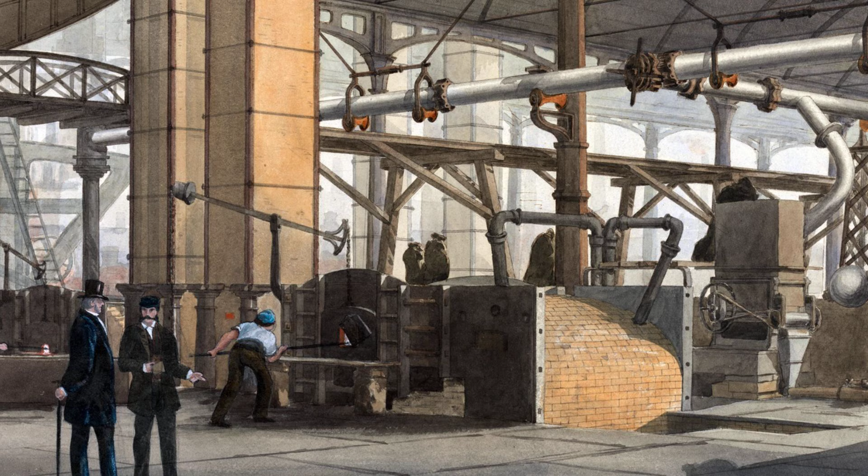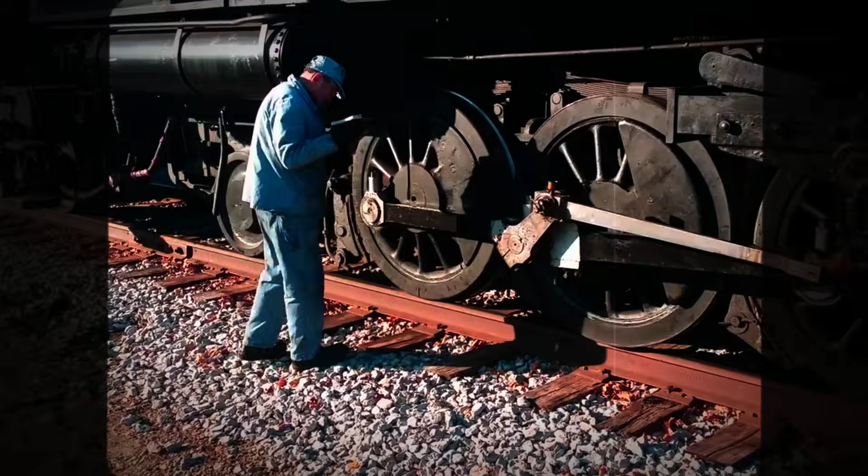The man who invented the turbine locomotive died forgotten, and the reasons why say more about progress than any success story ever could. By 1908, the heart of railway power was still the piston-driven steam locomotive, a machine both celebrated and resented by railroad engineers. Every journey began with the same ritual: oiling the rods, checking the valve gear, and bracing for the relentless pounding that echoed through the rails.

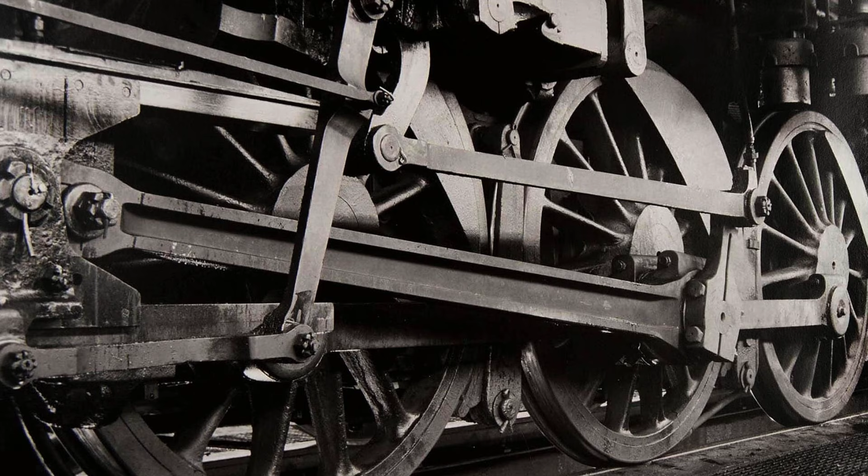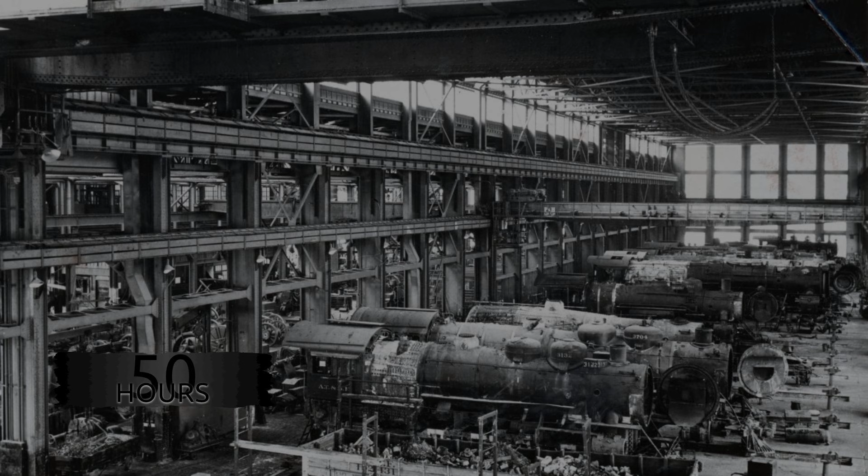Underneath the spectacle of churning wheels, an invisible war was being fought against the laws of physics and the limits of Victorian engineering. The numbers were impossible to ignore. A typical mainline locomotive demanded nearly 50 hours of maintenance for every 1,000 kilometers traveled. Bearings wore out, pistons cracked, and valve gear needed constant adjustment. Each mile cost more than just coal. It ate up labor, steel, and time.

Fuel consumption was staggering. In the early 1900s, railway companies reported burning through 85 kilograms of coal for every 100 kilometers, a figure that barely budged, no matter how much boiler pressure was pushed or how carefully the firemen stoked the flames. But the real enemy was hidden in the pounding rhythm of the pistons.

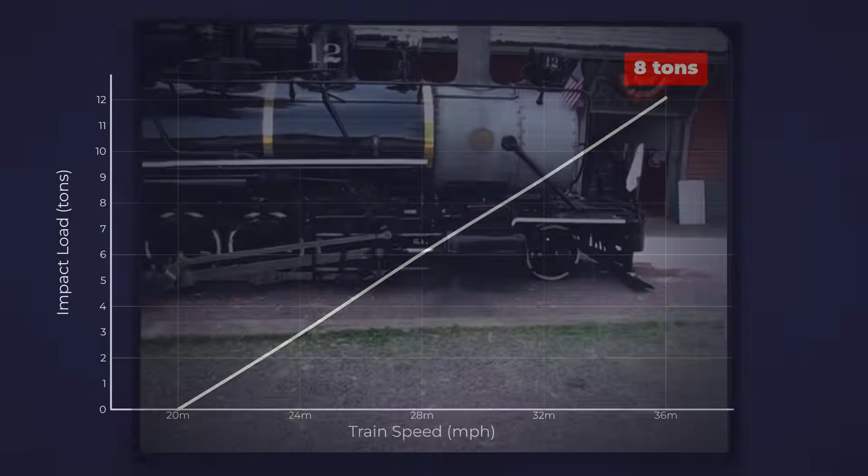As the wheels hammered the rails, a force known as hammer blow shook the track bed. Engineers measured these impacts in tons. On a fast passenger run, a single driving wheel could deliver a shock of over 8,000 kilograms to the rails with every revolution. The result was a cycle of track damage, derailment risk, and expensive repairs that grew worse with speed and power.

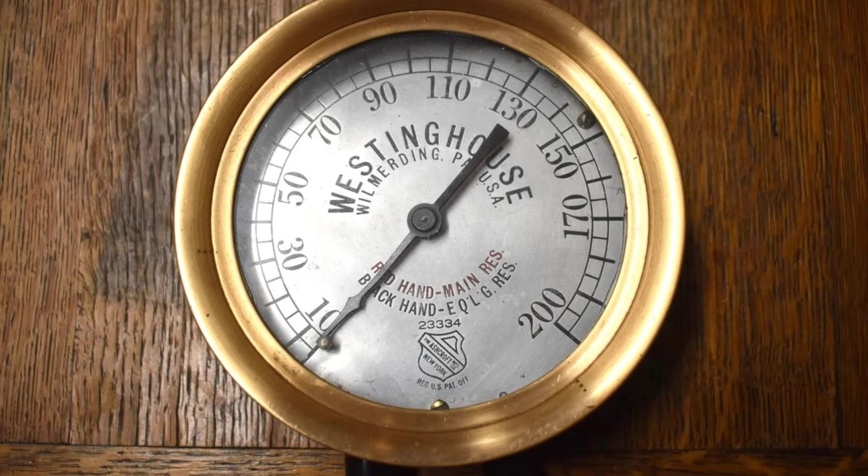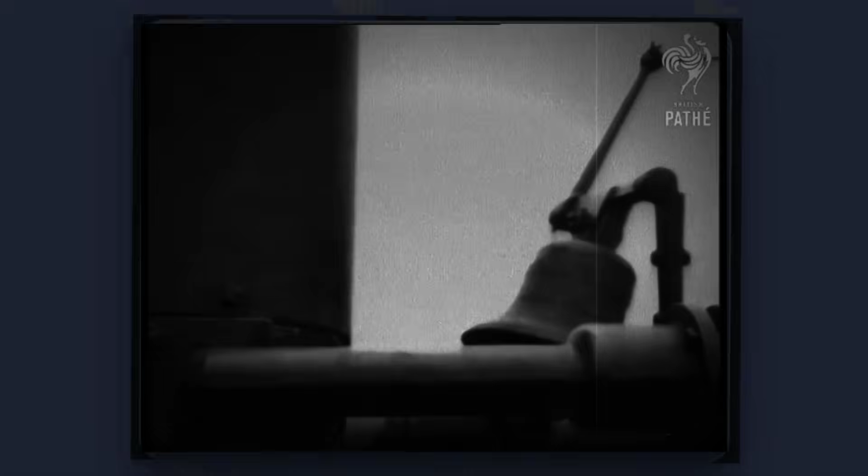Railway boards complained that the cost of track renewal had doubled in a decade. The 1908 issue of The Engineer warned that further increases in boiler pressure no longer brought meaningful gains in performance. The engines were running up against a wall. Thermodynamic losses compounded the problem. Reciprocating engines wasted much of their steam's energy as heat, bleeding efficiency with every stroke. Even the best piston designs struggled to convert more than 10 or 12% of the boiler's energy into motion. The rest vanished into the air, billowing from the exhaust in clouds that signaled wasted fuel and lost opportunity.

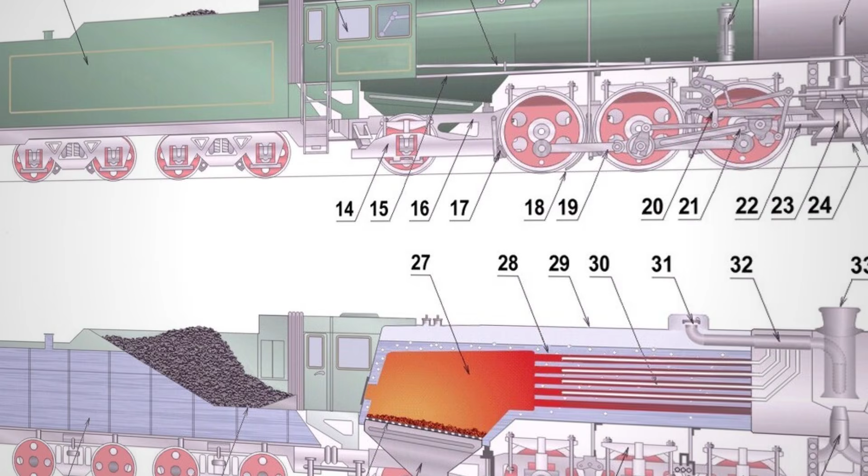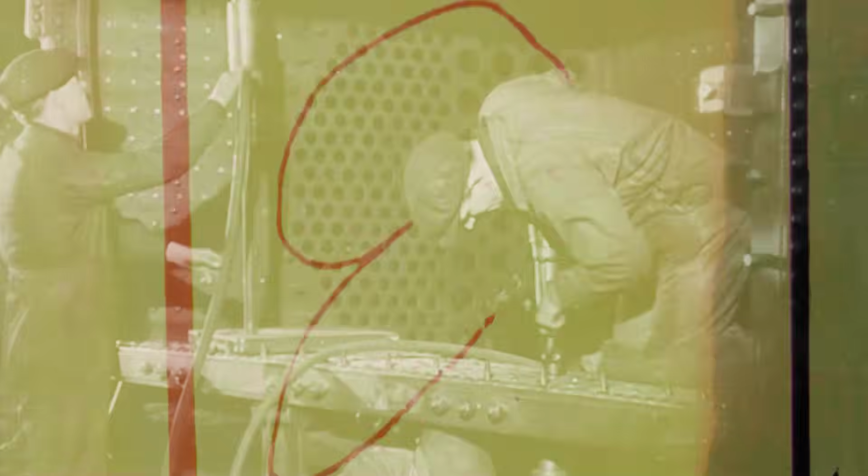The industry's answer was to build bigger, heavier machines, more cylinders, higher pressures, longer boilers. But each step forward brought new problems. Heavier locomotives meant more hammer blow, more track damage, and even greater maintenance costs. The cycle was unsustainable. Railway managers grew desperate for something smoother, more efficient, less brutal on both men and machinery. The search for a better solution became urgent, a matter of economic survival as much as engineering pride.

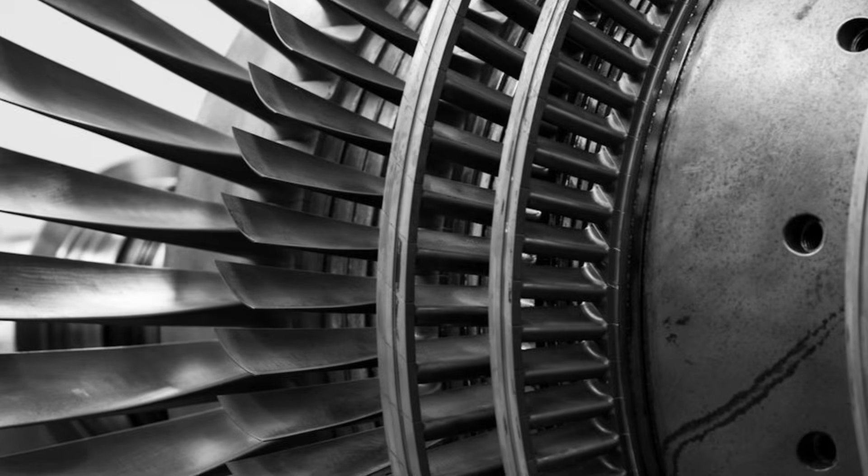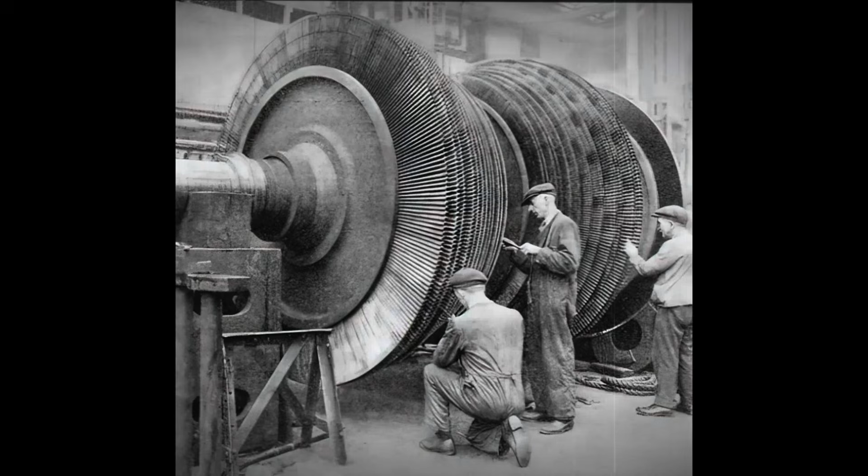In boardrooms and workshops across Europe, the question grew louder. Could the relentless violence of the piston be replaced by something cleaner, quieter, and more reliable? The answer, some believed, might lie in the continuous rotary motion of the steam turbine, a technology that had already begun to transform ships and power plants. But on the rails, the piston's grip remained ironclad, and the cost of failure was measured not just in lost money, but in shattered reputations and forgotten names.

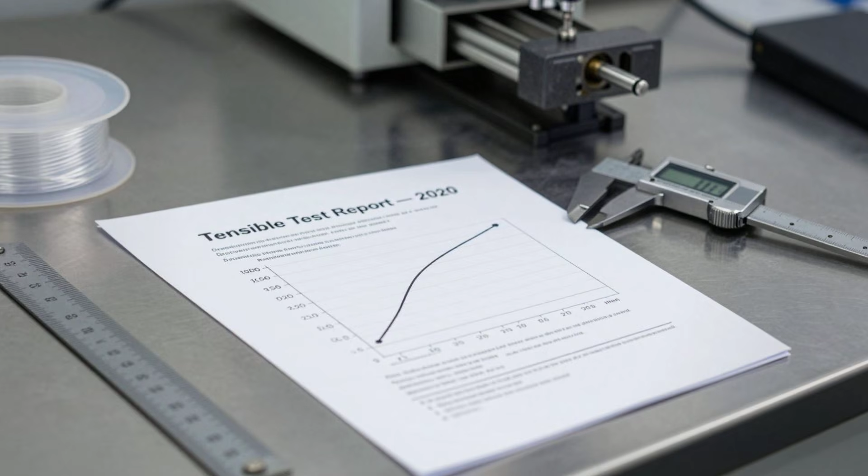Giuseppe Belluzzo entered the world in Verona in 1876, growing up as Italy's factories and railways reshaped the landscape. By 1898, he had earned his engineering degree from the Polytechnic University of Milan, a credential that marked him as one of the country's brightest technical minds. Rather than linger in academia, Belluzzo went straight to the railway shops of Milan, learning from seasoned engineers who measured progress in soot and sweat. This blend of rigorous study and hands-on work gave him a rare authority, someone who could speak both the language of equations and the dialect of the shop floor.

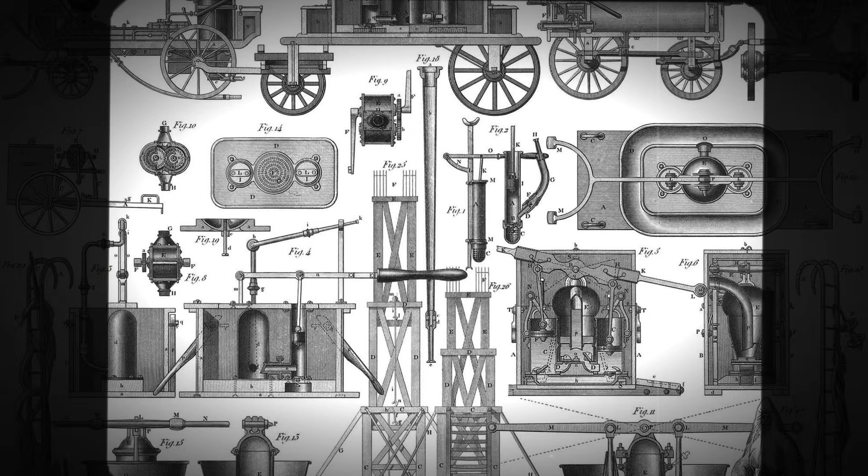Belluzzo's ambitions quickly outgrew routine repairs. In 1909, he filed United States Patent 931986A, titled Elastic Fluid Turbine. The patent's opening lines, written in his own careful script, set out a clear goal: continuous, uniform delivery of power with minimum pulsation, thereby reducing stress on the transmission elements. The diagrams were meticulous, each line revealing a mind that saw no divide between theory and practice.

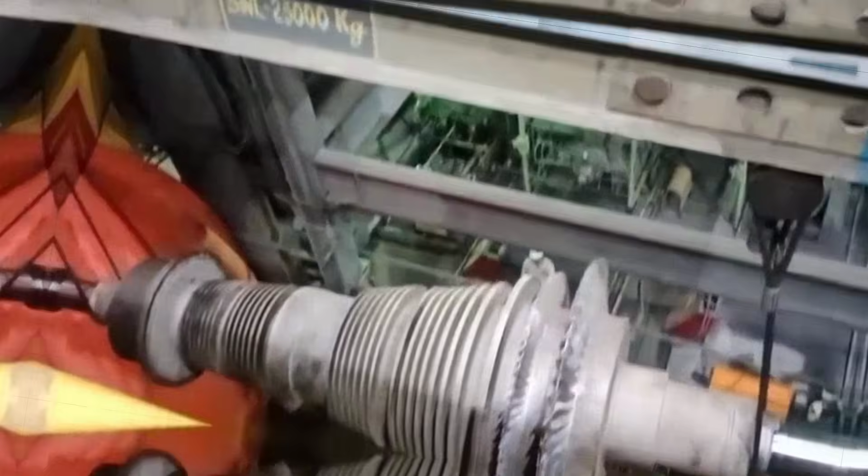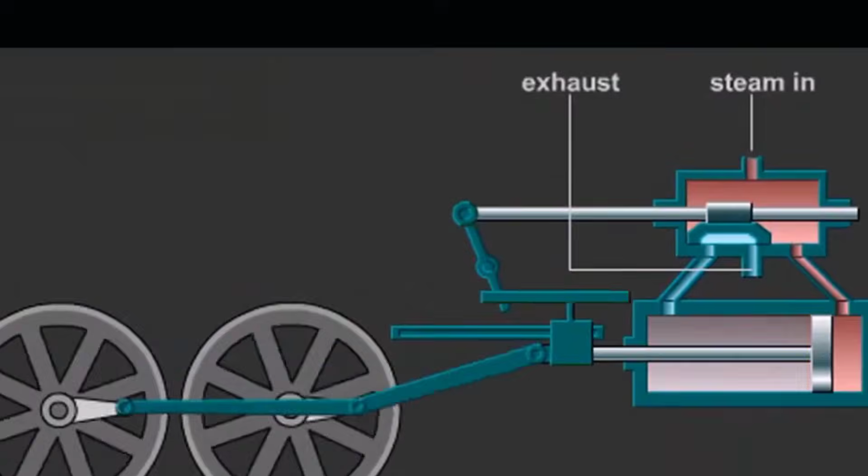Belluzzo's turbine was more than a technical curiosity, it was a direct challenge to the piston-driven engines that dominated railways, engines he saw as wasteful and violent in their motion. His frustration with the old ways ran deep. Piston engines hammered relentlessly, shaking carriages and wearing out rails. Belluzzo believed turbines could offer something better: smooth, efficient movement, less wear, more reliability.

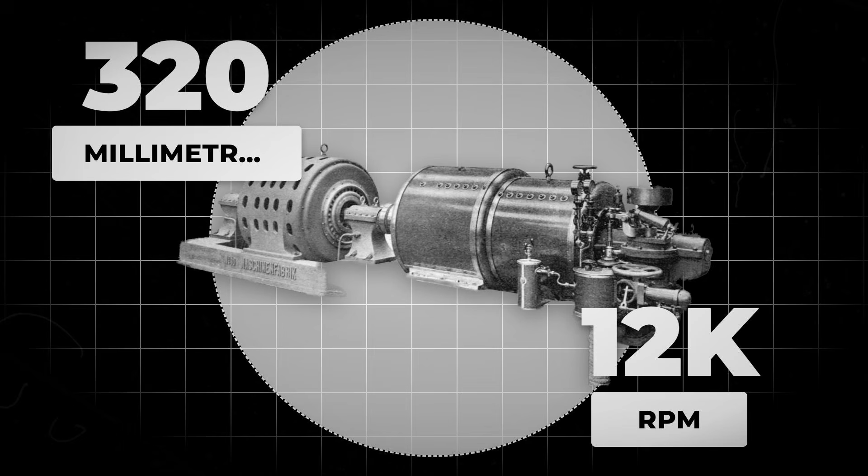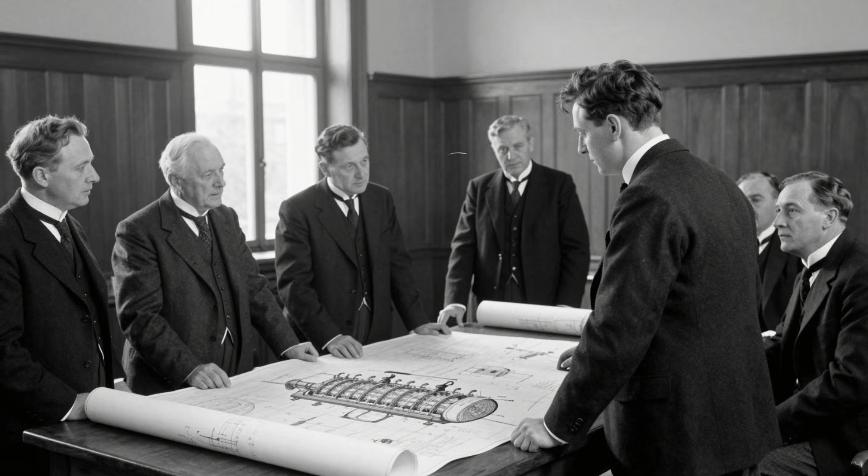His early patents, filed in both Italy and the United States, sketched out compact, high-speed rotors designed for real-world use, not just laboratory demonstration. The technical community took notice. By 1912, university records show Belluzzo had risen from assistant in 1899 to full professor at the Polytechnic University of Milan, a rare feat for someone in his 30s.

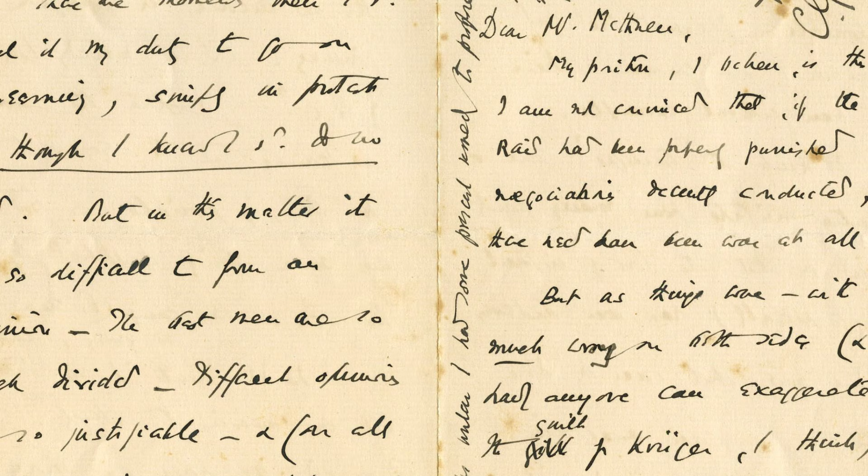Despite academic success, Belluzzo never settled for theory alone. Letters from this period, preserved in university archives, reveal a man impatient with tradition. He argued in lectures and correspondence that the future of rail power depended on boldness, on replacing the old with the radically new. For Belluzzo, the turbine was not just an improvement, it was a reimagining of how energy could move machines.

By the late 1900s, Belluzzo had gathered enough support to move from blueprints to construction. The optimism in his writing is unmistakable, a belief that the turbine locomotive could sweep away the limits of the past. Yet he understood the stakes. Failure would cost more than a machine, it would threaten his career and the very idea that vision could overcome convention. Belluzzo was ready to risk everything, convinced that engineering genius could break the iron grip of the piston.

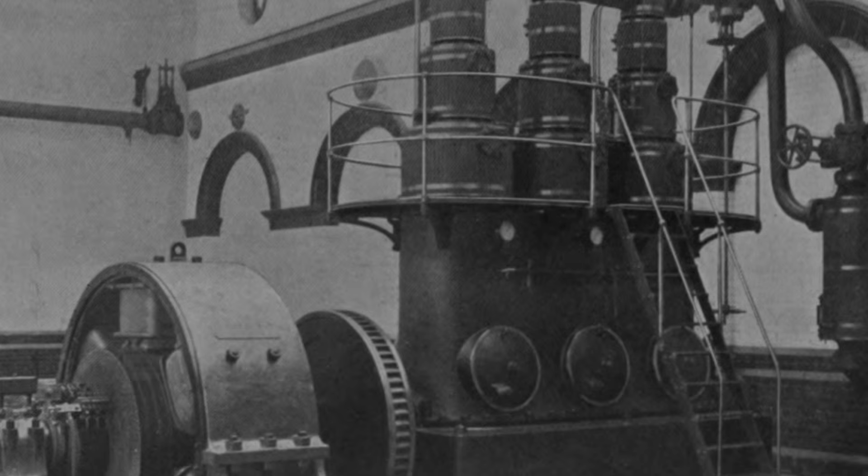Steam turbines dazzled engineers with their promise: silent, smooth, and nearly free from the pounding violence of pistons. But the railway was not a ship, nor a power plant. The challenge lay hidden in the numbers.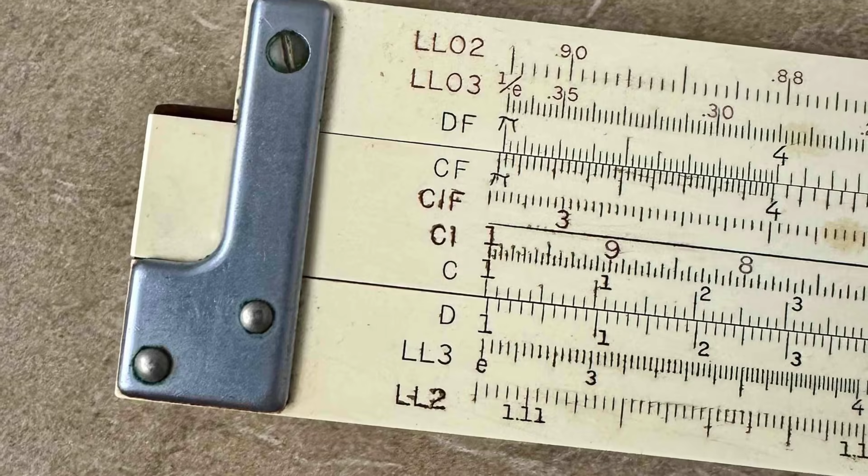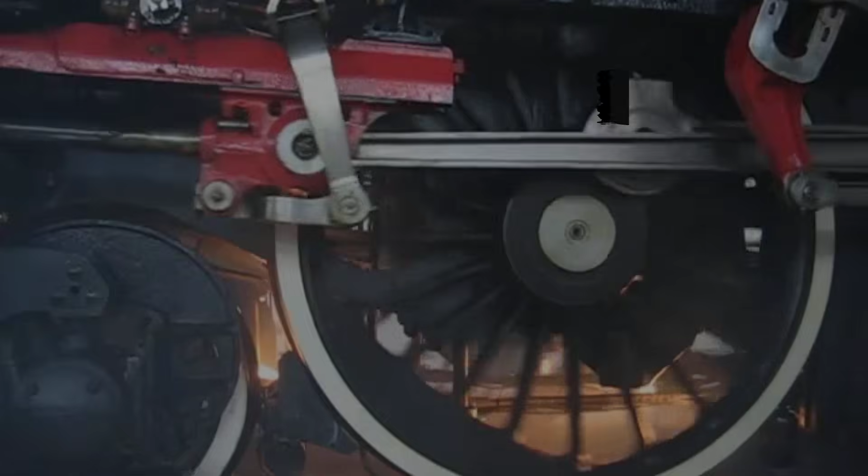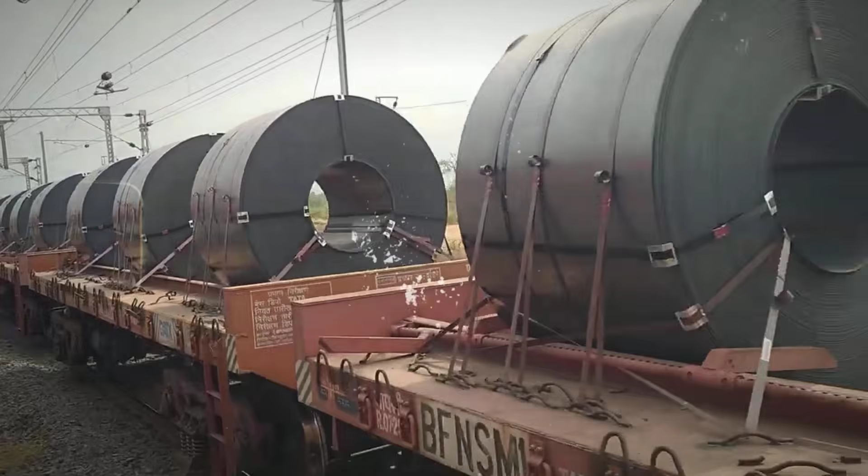A marine turbine spun at 6,000 revolutions per minute, generating power efficiently at high speeds. Locomotive wheels, by contrast, needed to turn slowly, about 750 revolutions per minute at full speed, and far less when starting a heavy train. The heart of the problem was mismatch. Turbines thrived on speed, but trains demanded torque, the raw, turning force needed to haul steel and cargo from a dead stop. Without adaptation, a direct-coupled turbine would spin the wheels so fast they'd tear themselves apart, or worse, fail to move the train at all when starting from rest.

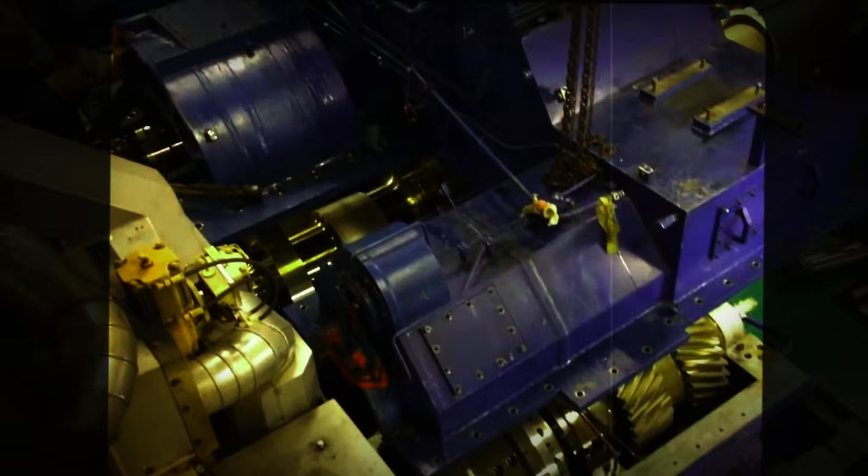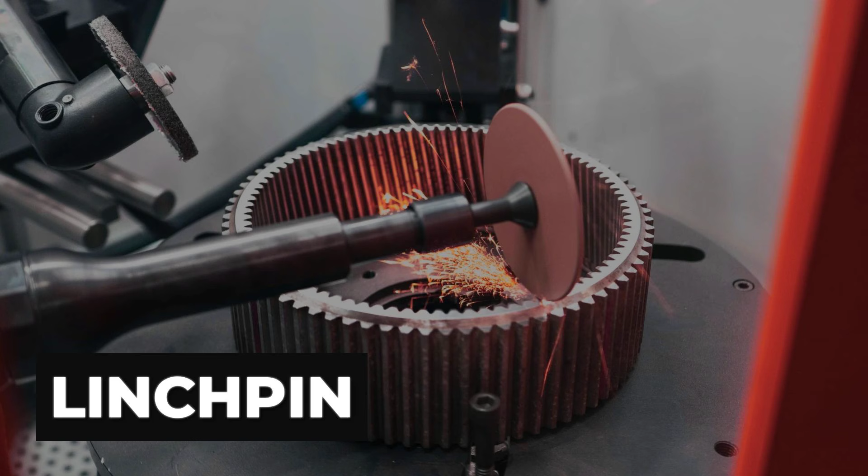Belluzzo understood this from the outset. His patent drawings sketched out a solution borrowed from shipyards: reduction gearing. By introducing an 8-to-1 gear ratio, his design allowed the turbine to whirl at 6,000 revolutions per minute, while the driving wheels crept along at a manageable 750 revolutions per minute. This gear set, compact yet robust, was the linchpin, translating high-speed rotation into the slow, muscular push required by rail.

The calculations were unforgiving. To deliver enough tractive effort, the gears had to absorb immense forces without shattering, while keeping friction losses low. Each tooth had to mesh perfectly, every revolution a test of metallurgy and precision. Belluzzo's notebooks from 1908 are filled with gear diagrams, torque curves, and handwritten equations, evidence of nights spent wrestling with the stubborn realities of physics.

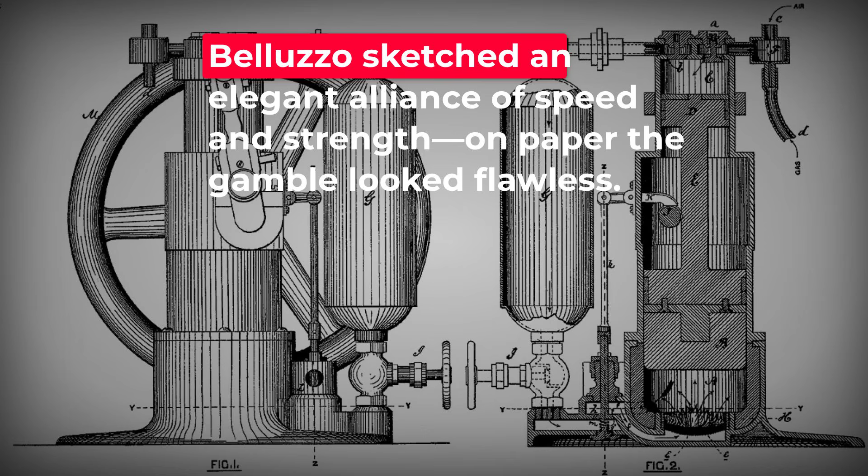The reduction gear wasn't just a technical fix, it was a gamble. No European locomotive had ever relied so completely on a single, high-speed gear train. If it failed, the turbine concept would fail with it. But on paper, the solution seemed elegant, an alliance of speed and strength, promising to finally break the cycle of hammer blow and wasted energy.

The workshop was ready. The next step would test whether theory could survive the heat and chaos of the railway.

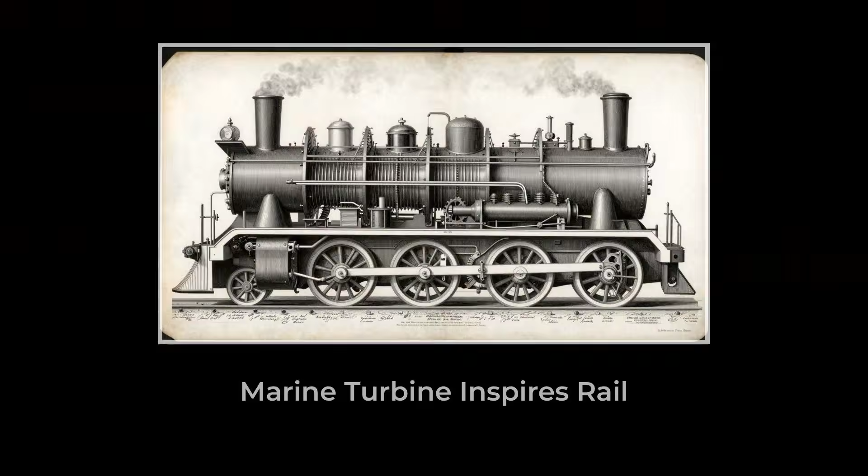In 1897, Charles Parsons changed the course of engineering with Turbinia, a vessel that left warships trailing in her wake at over 34 knots. Her secret lay in a turbine, spinning at thousands of revolutions per minute, delivering a flow of energy so smooth and continuous that piston engines seemed instantly outdated.

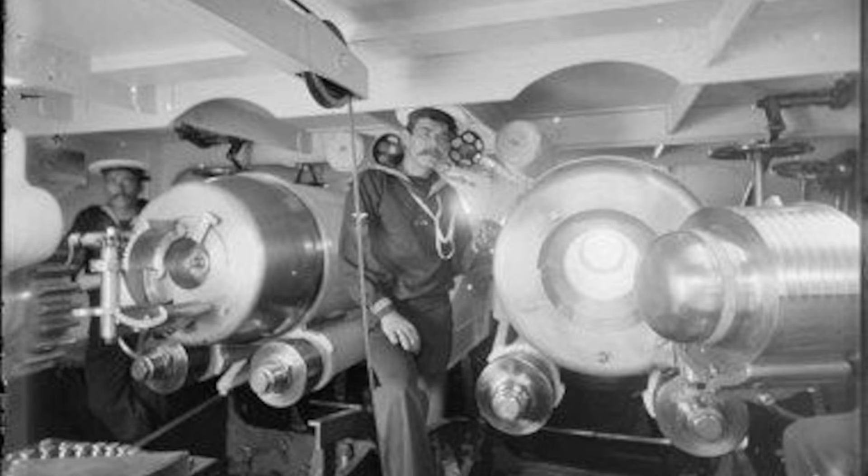The Navy took notice. Soon, Parsons's turbines powered ocean liners and warships, where reliability and speed were not just advantages, but necessities. By the early 20th century, stationary turbines in power plants were achieving thermal efficiencies above 30%, a benchmark piston engines could never reach. Fewer moving parts, less vibration, and a steady rotary drive meant turbines transformed steam into motion with remarkable efficiency.

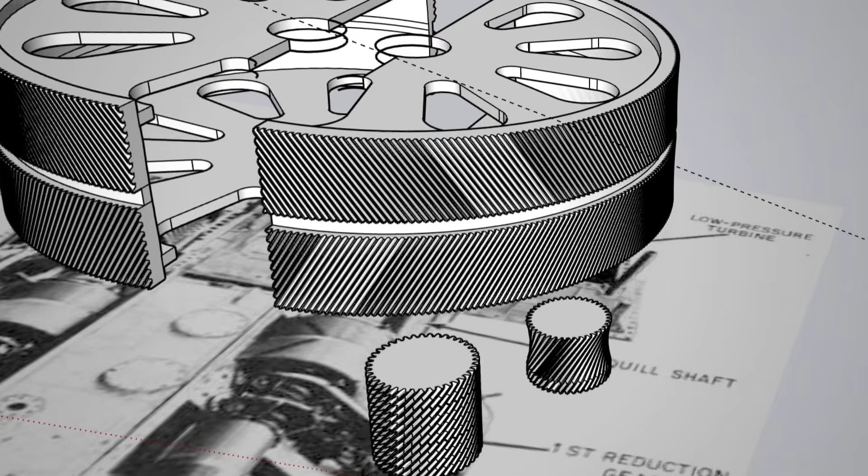Belluzzo watched these developments with the curiosity of an inventor searching for the next leap. His notebooks from 1907 brimmed with calculations, steam flow rates, blade angles, and the ratios that let turbines spin propellers at high speed while keeping ships steady.

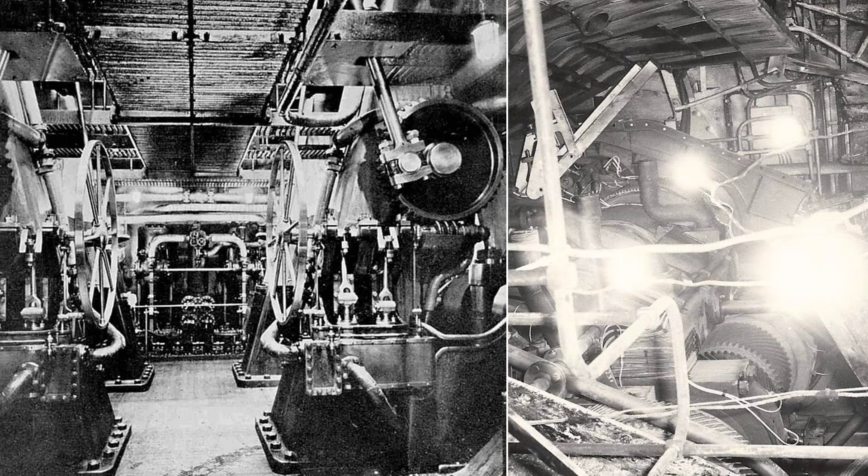Parsons' success was more than a technical feat. It was a signal that a new kind of power was possible. If turbines could drive ships across oceans, why not trains across land? The promise was clear. Turbines offered continuous rotary power, doing away with the hammering and wasted energy of piston locomotives. The efficiency numbers from marine and stationary turbines, above 30%, hinted that steam's story was far from over.

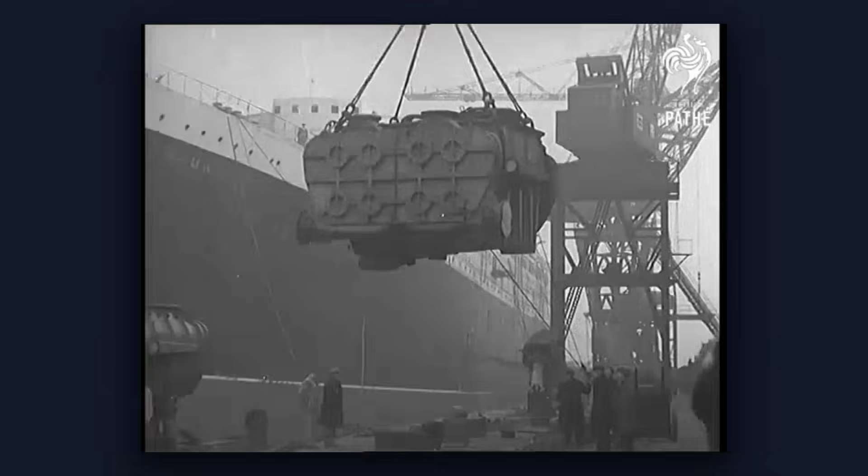Belluzzo imagined a locomotive freed from pistons, powered by a high-speed rotor and reduction gear, blending the confidence of shipyards with the precision of power stations. The logic was compelling. Adapt what worked at sea and in generator halls to the rails, and the rules of railway engineering might change forever. For a moment, it seemed the relentless drive of the turbine could finally outpace the old piston, promising a future where power flowed in one smooth, unbroken stream.

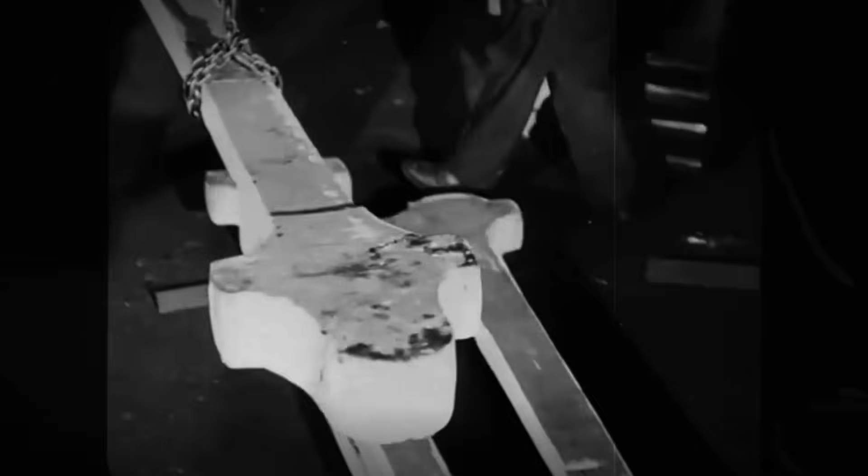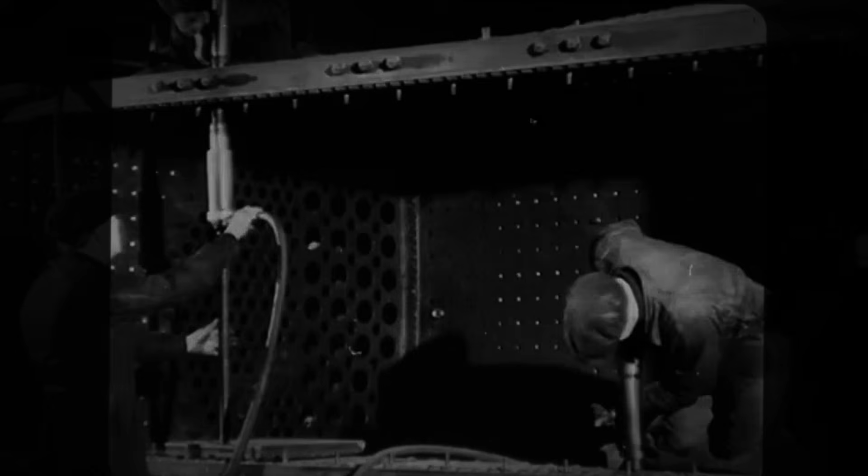Inside the Officine Meccaniche workshops, the air shimmered with heat and the scent of oil. Belluzzo stood among machinists and fitters, sleeves rolled, hands blackened from graphite and grease.

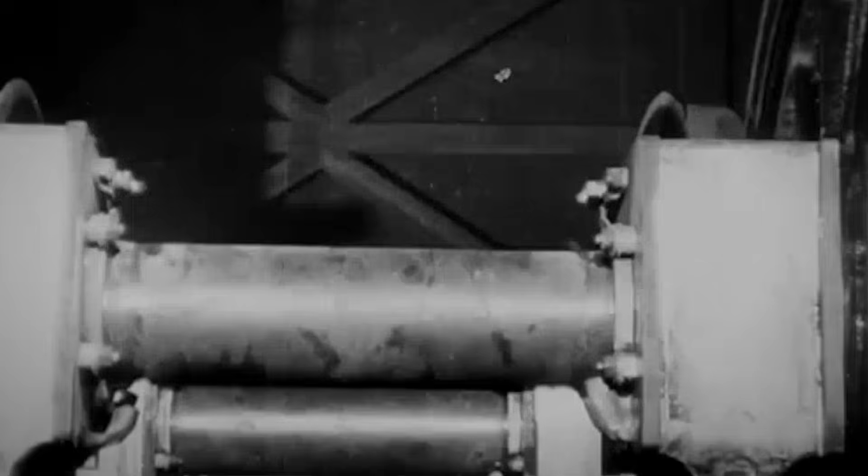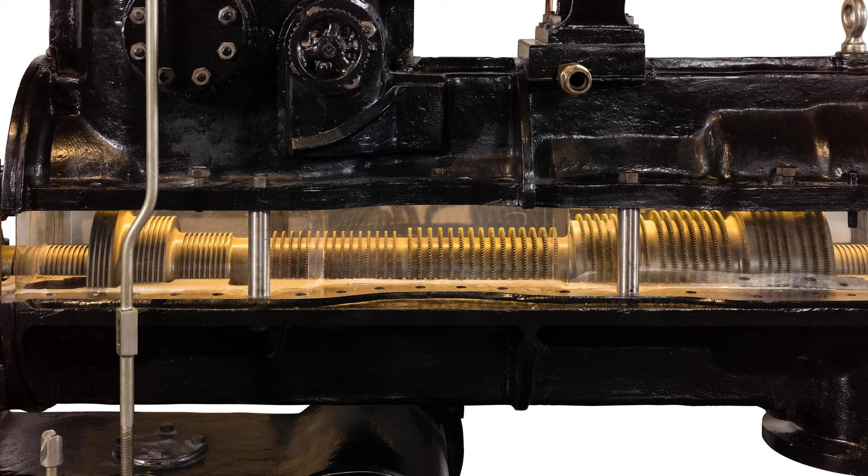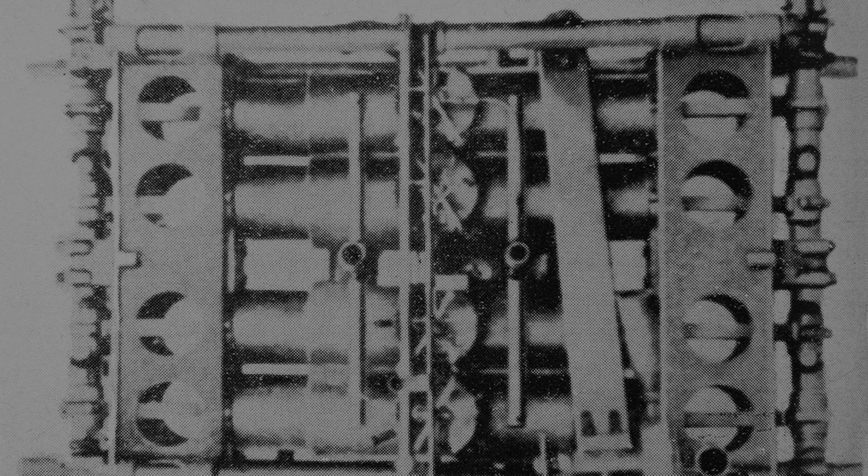The conversion began with the bones of an 1876 060T shunting engine, its old driving axle removed, frame braced for new weight. Four axial flow turbines, each housed in a cast iron shell, took shape on benches lined with blueprints and calipers. Two turbines per side were bolted to the outside of the boiler, each connected in sequence by thick, flexible pipes that would carry steam from one to the next. The ledger from Officine Meccaniche records the delivery of these turbine housings in March 1908, each weighing nearly 180 kilograms.

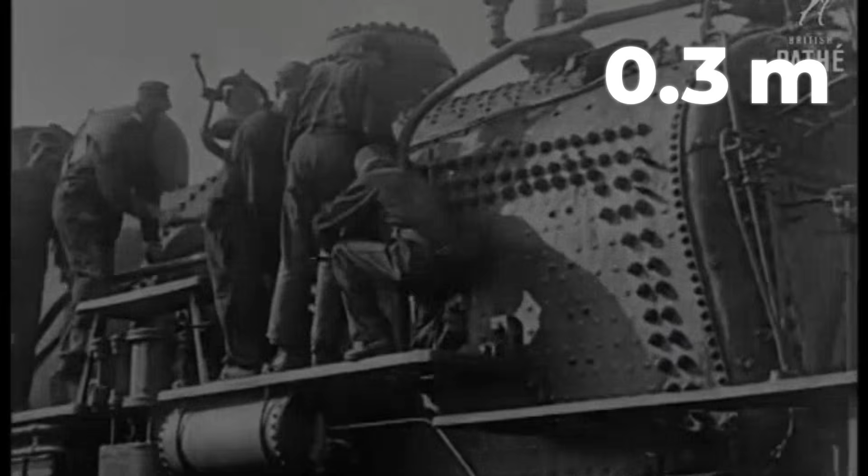The boiler itself was transformed. At the rear, a new steam dome rose above the barrel, its height increased by nearly 30 centimeters, an ungainly crown meant to steady the pressure for the turbine's relentless appetite. The dome's size startled even seasoned boilermakers, who grumbled that it looked more at home on a battleship than a locomotive. Inside, brass turbine blades were fitted with painstaking care. Each blade had to withstand the bite of high-pressure steam, spinning at speeds no piston engine could survive.

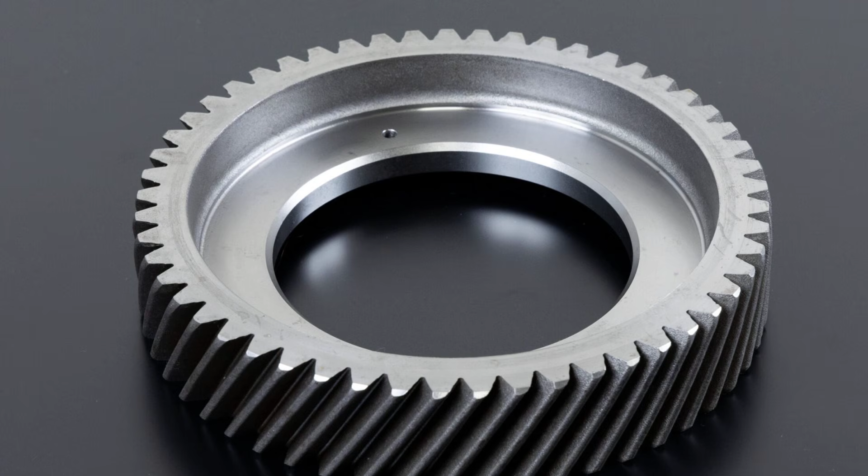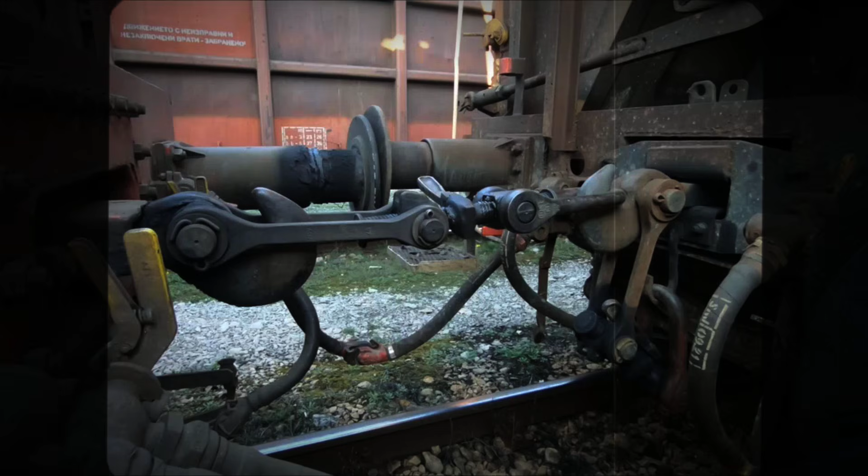The reduction gears, forged from hardened steel, waited on racks nearby. Their 8-to-1 ratio was the heart of Belluzzo's gamble, translating the turbine's dizzying revolutions into the slow, determined turn of a railway wheel. Chains and couplings designed to flex as the locomotive rocked and swayed linked the turbines to the wheels. Steam admission valves, four in all, were mounted boldly on the exterior, promising easy access but exposing them to every cinder and lash of rain.

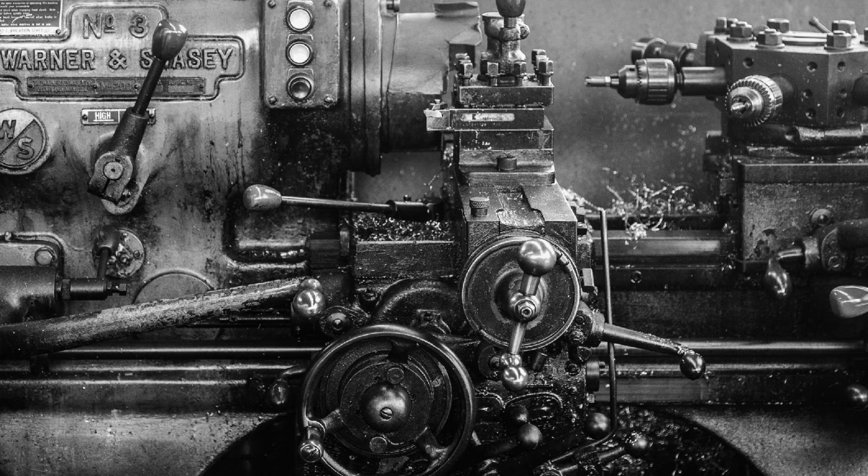The workshop logbooks note the hours spent aligning gear teeth, checking tolerances by hand, and adjusting the fit of the dome, tasks that stretched late into the night.

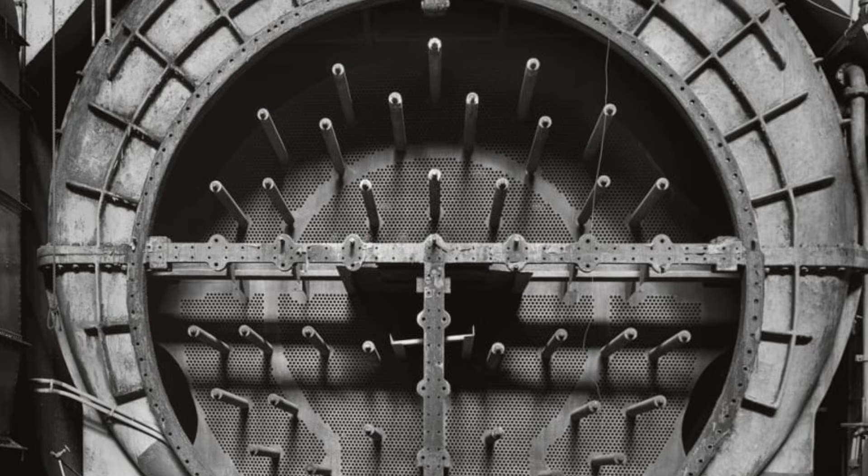By April, the machine stood ready, its profile unmistakable, a boiler bristling with turbine housings, the oversized dome gleaming above. Belluzzo watched as the last bolts were tightened, the promise of smooth, unbroken power now embodied in steel. The locomotive was ready for the rails, poised between hope and the unknown.

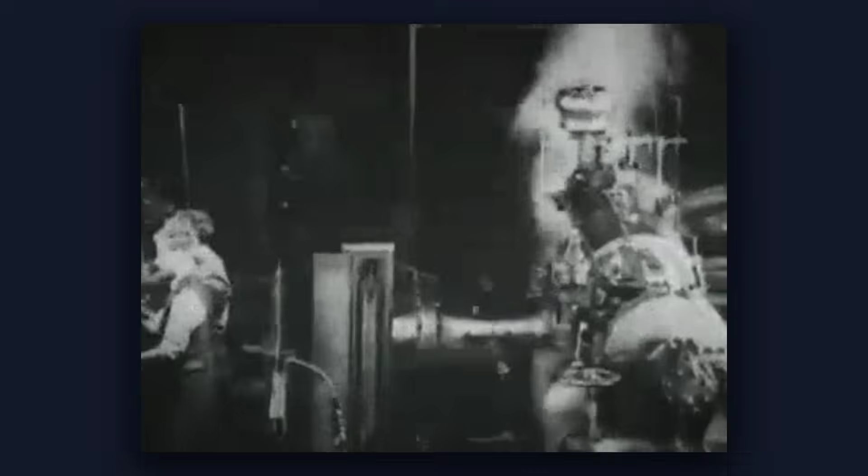May 13, 1908. The Milan test grounds buzzed with anticipation as the turbine locomotive rolled onto the track, its oversized steam dome gleaming under a pale spring sun. Belluzzo moved along the footplate, checking gauges and listening for the telltale whine of spinning blades.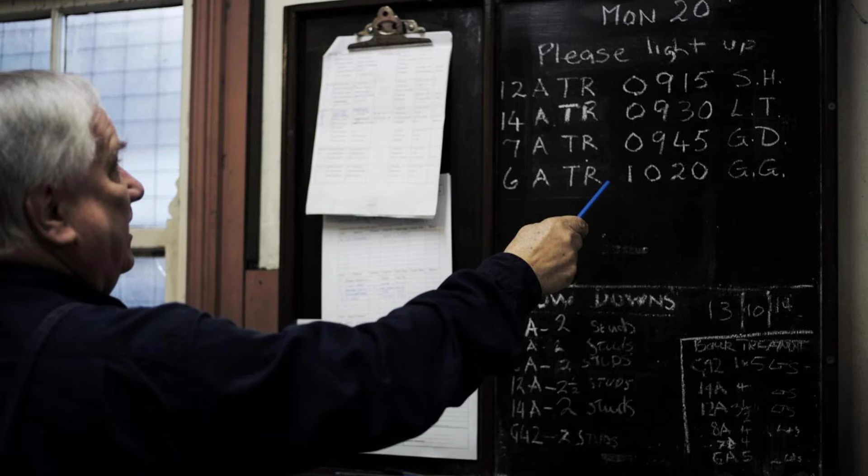The log entry from that day records a measured speed of 45 kilometers per hour and a continuous output of 200 horsepower. Acceleration was smooth, the usual hammer blow absent. An engineer's note from the test log reads, 'No perceptible shock on the rails. The machine glides as if on oil.'

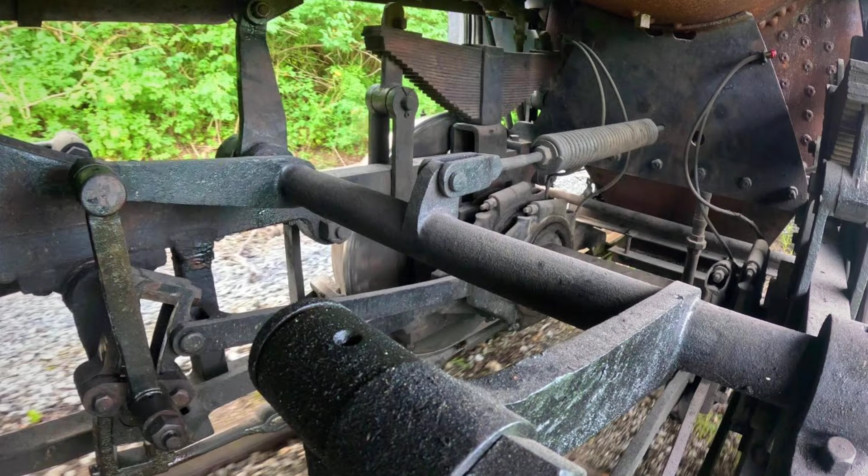Crowds along the fence murmured in surprise, and the next morning, Corriere della Sera called it a spectacle of modern engineering. The press marveled at the absence of smoke and shudder, describing the locomotive as a promise of what rail travel could become. Yet even in triumph, a few mechanics exchanged uneasy glances, whispering about the unfamiliar gears and the challenge of keeping them running. For a moment, though, the future seemed to belong to the turbine and to the man who had dared to build it.

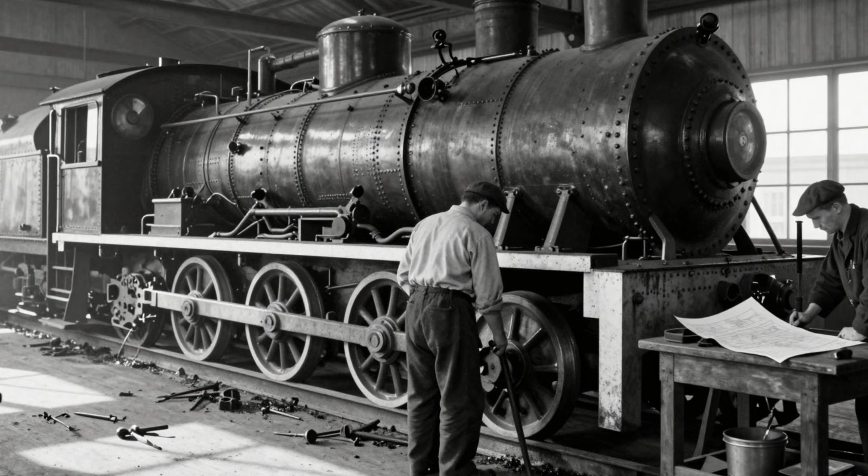In the weeks after the first public trials, the turbine locomotive returned to the workshop for what was supposed to be routine inspection. Mechanics opened the gear housings and found the beginnings of disaster.

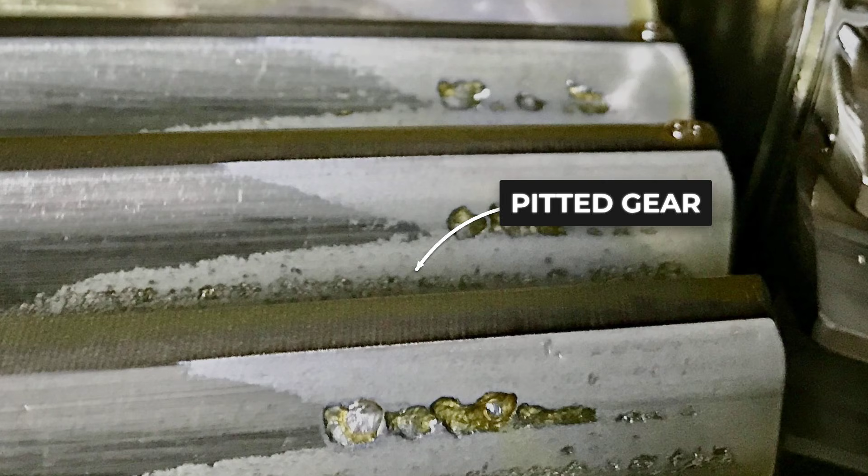After just 150 hours of service, the reduction gears showed visible wear. Machinists recorded in the October 1908 log that the teeth needed to be remachined, a job rarely required so soon on any standard piston locomotive. Each pass of the turbine's high-speed shaft had left microscopic scars, the metal pitted and roughened by forces it was never meant to endure.

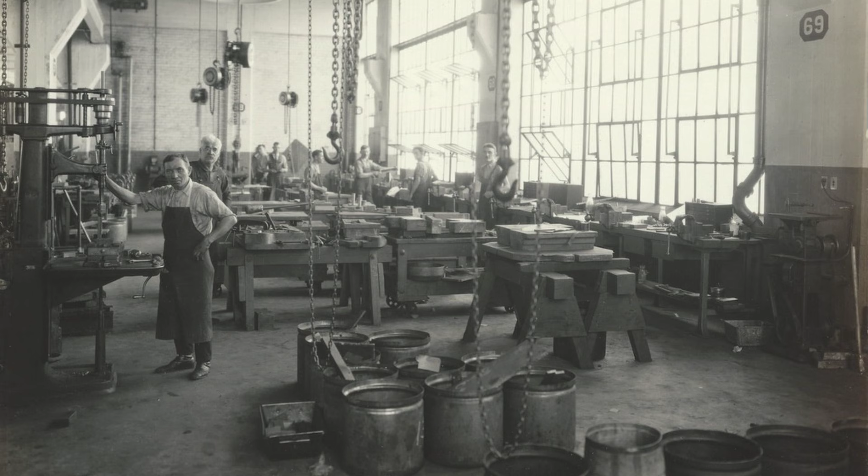The problems did not stop at the gears. Flexible steam pipes, meant to carry pressure from boiler to turbine, had begun to leak. By the third month, pressure drops reached 15%, cutting power output and forcing the crew to patch joints with strips of canvas and wire. The workshop ledger tells of repeated shutdowns to replace gaskets and retighten flanges, each repair adding hours to the maintenance tally.

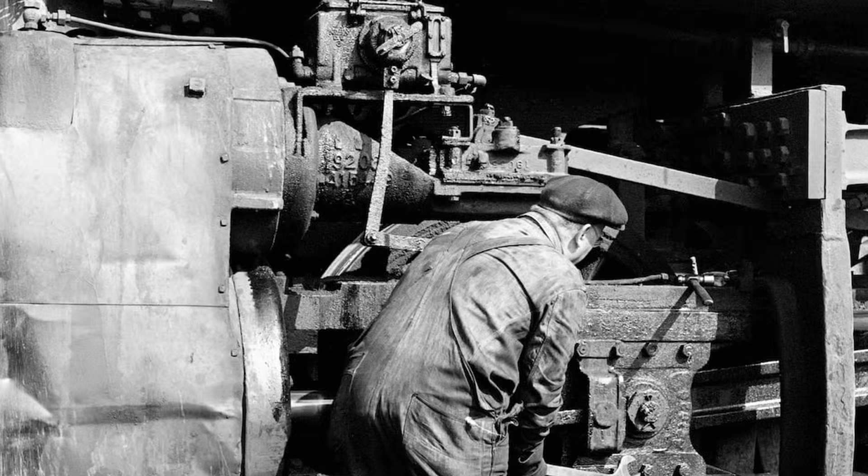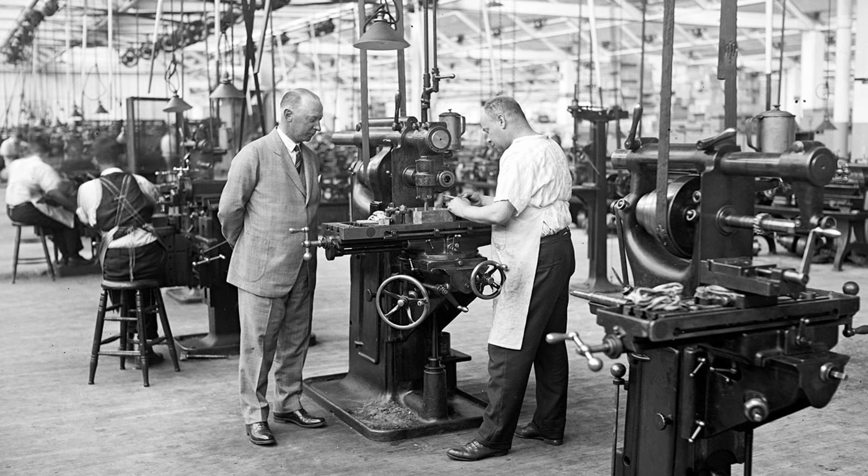For the men tasked with keeping the machine running, optimism faded quickly. The numbers in the logbook were stark. Maintenance hours for the turbine prototype outpaced those of conventional engines, and every day out of service meant lost revenue. The promise of smooth, efficient power was being buried under a mountain of repairs. Even the most skilled fitters began to question whether the turbine's brilliance could ever survive the realities of the railway.

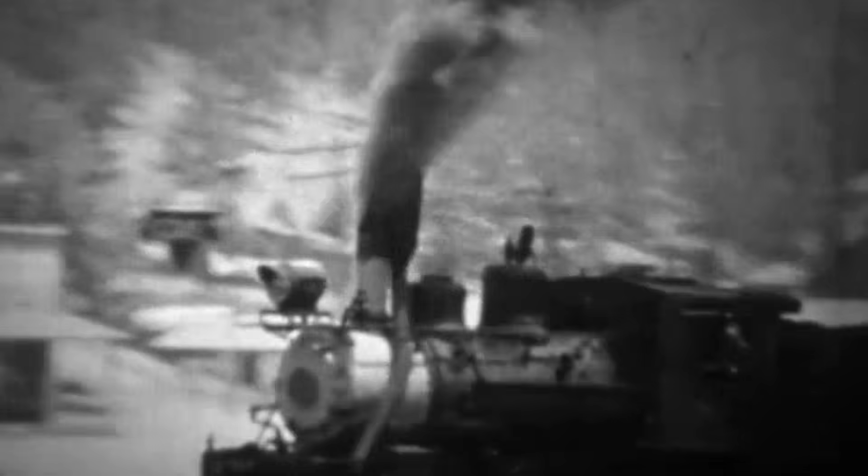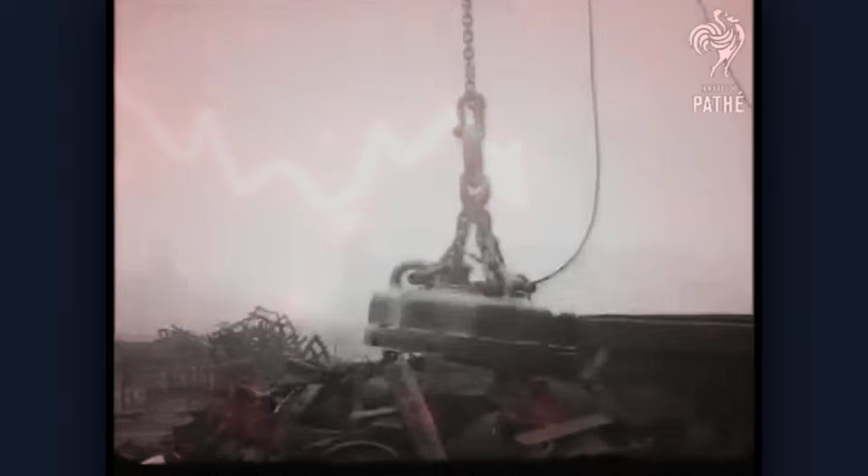For every promise of smooth power and reduced track wear, there was the reality of expensive gears, custom-fitted steam pipes, and unfamiliar maintenance demands. The board compared capital outlay against the daily grind of operating costs. Turbine construction demanded specialized labor and new tooling, while the anticipated savings in fuel and track renewal simply failed to materialize in the trial balance sheets.

A single line from the committee's summary captured the institutional mood: 'The turbine locomotive, though ingenious, cannot justify its premium in the present economic climate.' With that, the experiment's fate was sealed. The board deferred any further orders, choosing instead to monitor conventional designs and the rising promise of diesel-electric power. The minutes closed with a final chilling calculation: the turbine's financial penalty outweighed its technical allure.

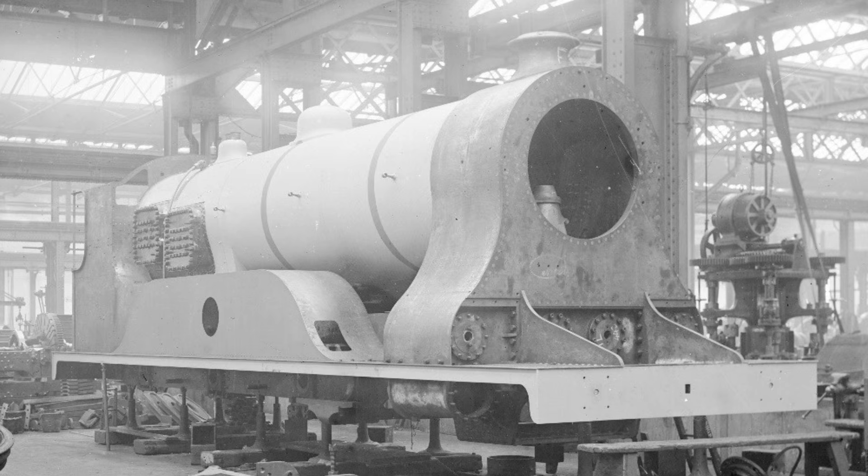In that moment, the dream of a new era in rail propulsion was quietly set aside, leaving its inventor with nothing but the echo of what might have been.

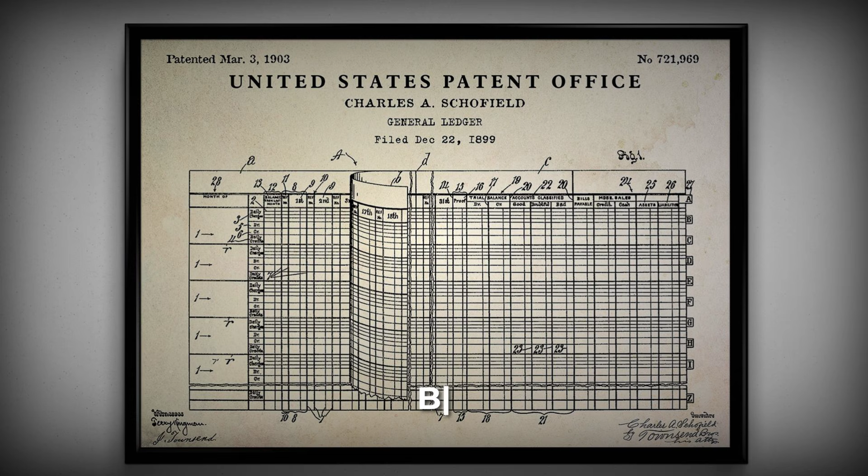Obscurity isn't just a fate, it's a verdict, handed down by the engines that win. Today, turbine technology drives super-fast trains across continents, while Belluzzo's name rarely appears outside old patent ledgers. Innovation's graveyard is crowded with visionaries lost to time, yet every leap forward borrows from forgotten minds. We still ride the tracks he once imagined, whether we remember him or not.